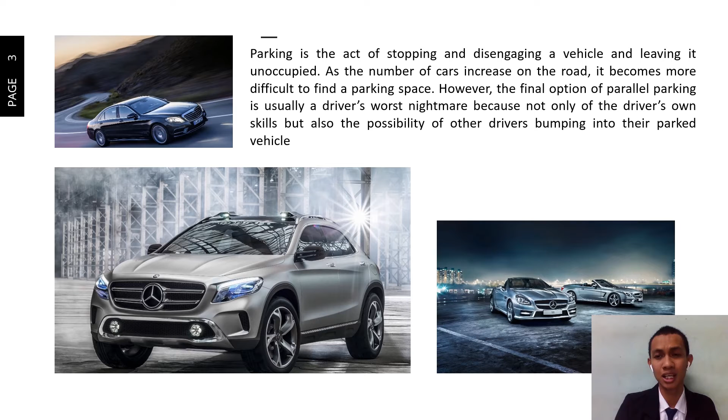So the solution is to make human work easier. Engineers are working on a new technology, automatic parking, which is an autonomous car maneuvering system that moves a vehicle from a traffic lane into a parking spot. To perform parallel, perpendicular or angle parking, the automatic parking system aims to enhance the comfort and safety of driving in constrained environments, where much attention and experience is required to steer the car.

The parking maneuver is achieved by means of coordinated control of steering angle and speed, which takes into account the actual situation in the environment to ensure collision-free motion within the available space. The car is an example of a non-holonomic system, where the number of control commands available is less than the number of coordinates that represent its position and orientation.

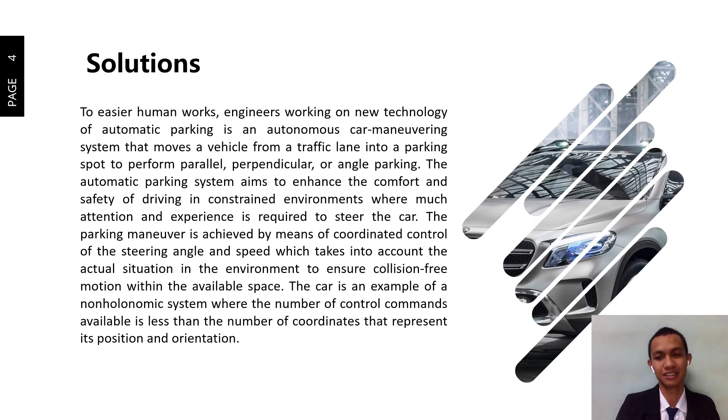Today I want to talk about the methodology. The method for the automatic parking system is proposed based on the approach of piecewise smooth switching control algorithms for chained systems, and the corresponding system package is developed.

There are three components to develop this parking system. First, we have the control law for the steering angle and the driving velocity. Second, we need to do the simulation. And third, the algorithm for various kinds of parking tasks under steering angle and parking space limitations.

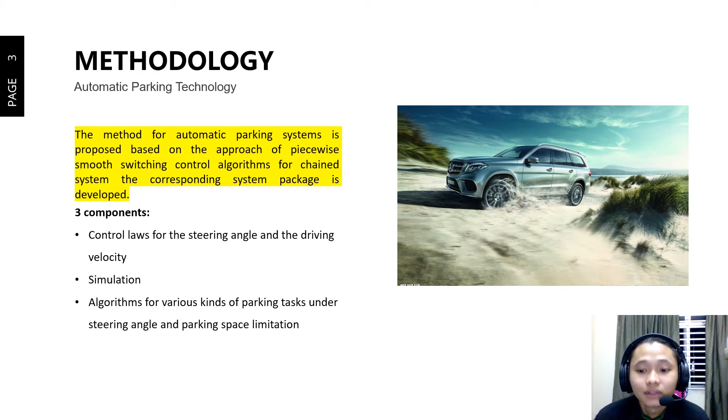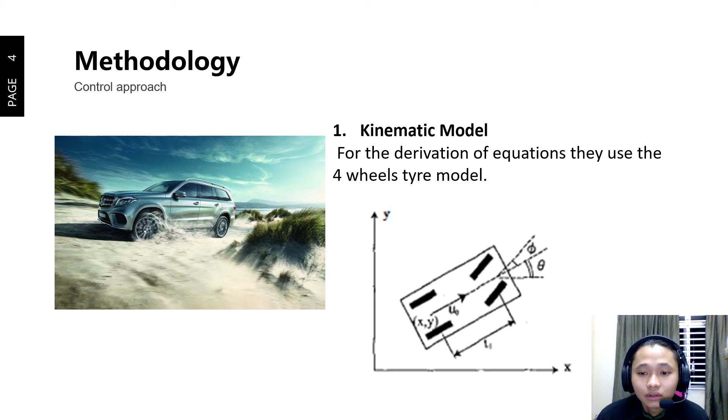For the control approach, first we must have a kinematic model. For the derivation of equations, they use the four-wheel tire model. Next is the state transformation. In order to apply the approach of piecewise smooth switching control algorithms for chained systems to the control design of this parking system, the kinematic model is transformed into a chained system first, which is the canonical form for non-holonomic systems.

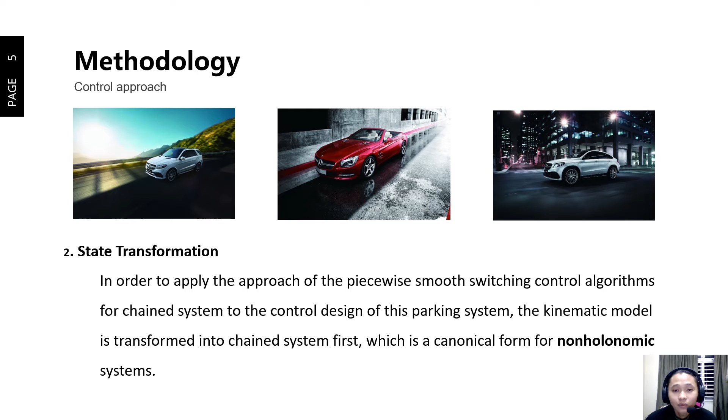The third part of the control approach is the design of the control input. Design inputs are the physical and performance characteristics of a device that are used as a basis for device design. In other words, establish and maintain procedures to ensure the requirements are appropriate by addressing user needs and intended use in terms that are measurable or can be calculated.

The fourth part of the control approach is the synthesis of input. Synthesis is a process of converting RTL to a technology-specific gate level netlist. The goal of synthesis is to get a gate level netlist by inserting clock gates and logic optimization. Usually we can see it in logic gate form.

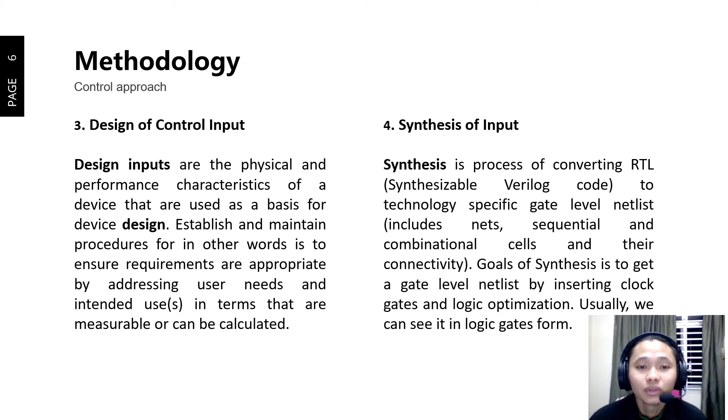After we decide the control approach, we can do the simulation. This is to validate the proposed switching algorithm. Simulations are done by considering all control conditions and equations. All related graphs will be observed and used to generate the parking algorithm. There are many simulation software that can be used, such as MATLAB and CarSim.

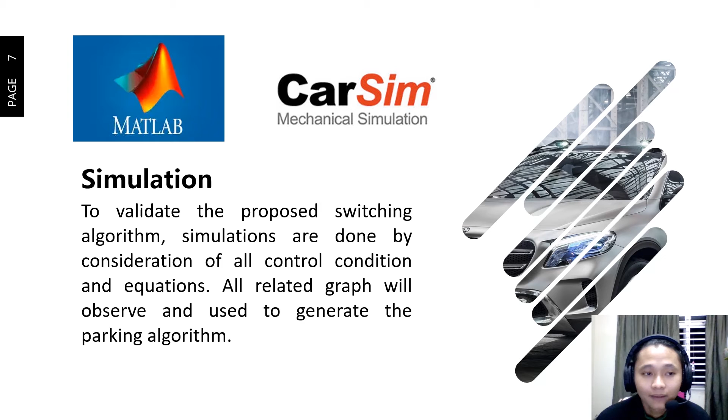Lastly, we can move to the parking algorithm. From the simulation result, a parking algorithm will be generated. The parameters are based on the car specs, such as the length of the car, width of the car, wheelbase, tread width, and the largest steering angle the car can make.

This algorithm is done to determine the desired trajectory for a car to park. All information will be stored in the ECU of the car, enabling it to give an output from the input sent from the sensor when the driver wants to use this feature.

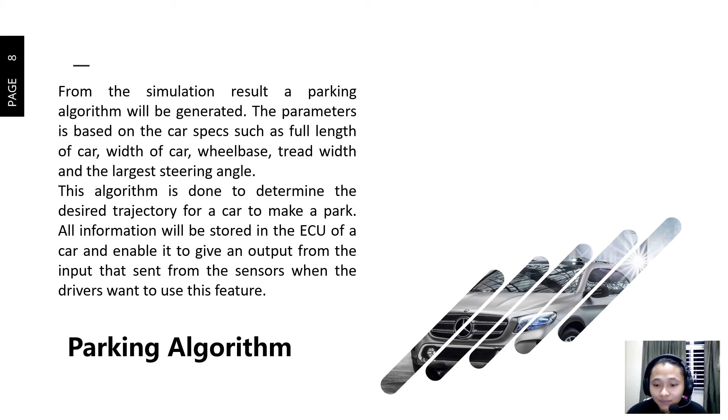This is the example of path and trajectory of parking type diagram. There are many types of parking, such as the parallel parking, column parking, and row parking.

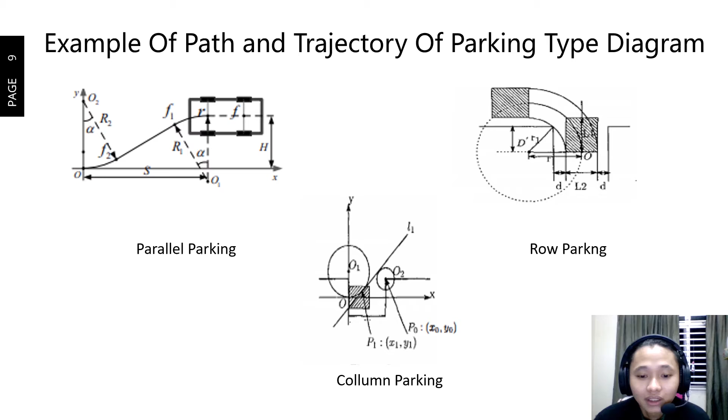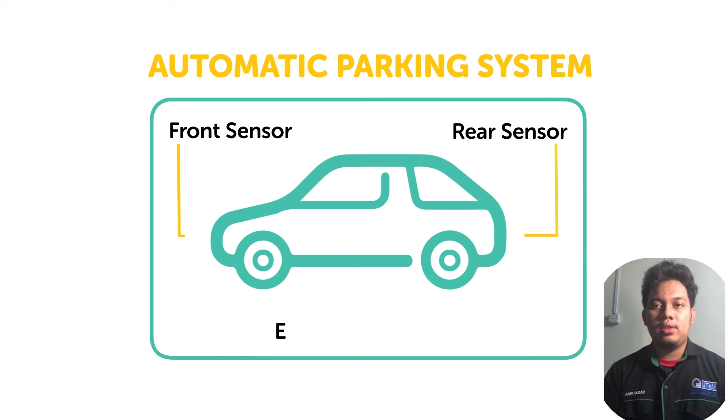Today I will present about the working principle of automatic parking system. Nowadays, people are having a hard time parking their car into a parking space. To solve this issue, automatic parking system was created. I will present how the system works on this video. There are 3 sensors in the car system: rear sensor, front sensor, and extra side sensor, which function to measure the car parking space for the driver.

When looking for the suitable space, just push the automatic button system. Make sure to keep the speed below 40 km/h. When the system notices an empty slot, it will give a warning to the driver to stop. Then put the car into reverse. After that, release the car steering and let the system do its work. The car sensor will tell when to turn.

The system will also adjust the gap between the sidewalks and the car behind and front car to avoid any damage. Although the driver puts the car in drive mode, the car will still straighten to help the driver fix the car into the parking slot.

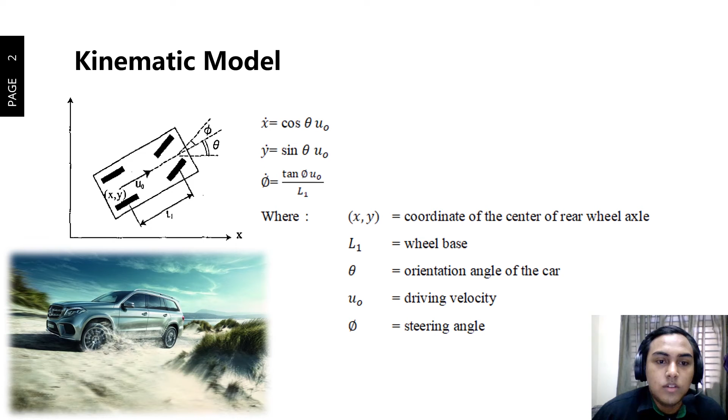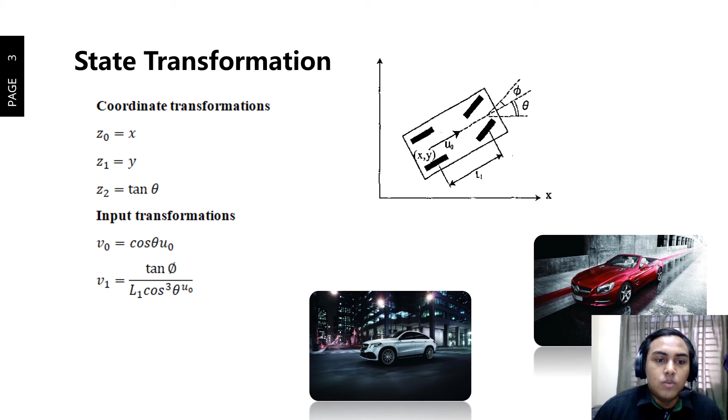I will present about working calculation. This is the kinematic model of a car in X and Y direction, and this is the formula for calculating the X, Y, and Phi rates. Next is state transformation. From the same diagram of the model of a car in X and Y, we can calculate the coordinate and input transformation.

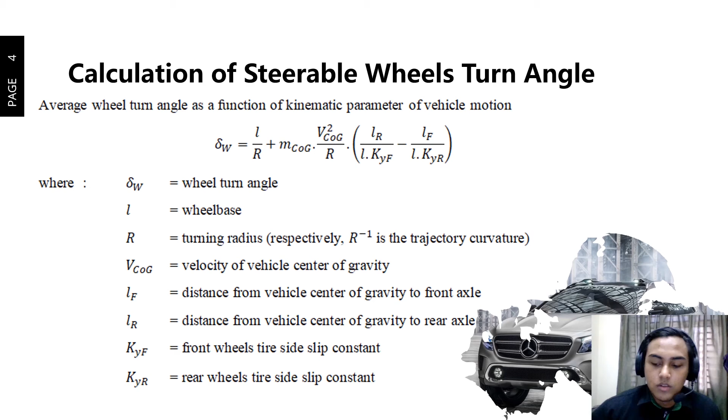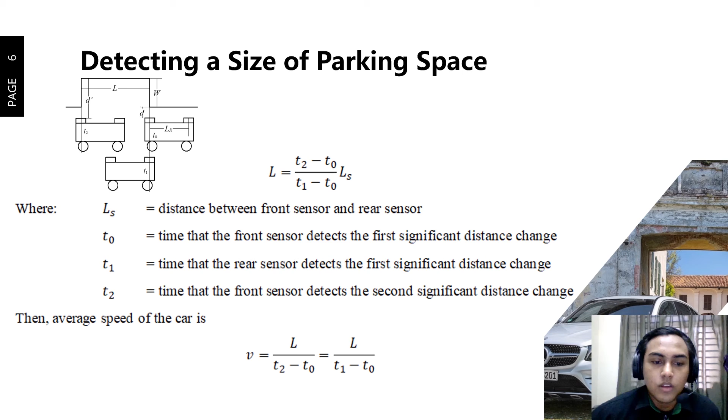This is how we detect the size of parking space. The car is installed with 2 sensors at the front and at the rear. From the time taken by both sensors, we can calculate the length of the parking space. Then from the value of the size of the parking, the car can decide whether it can park in or not.

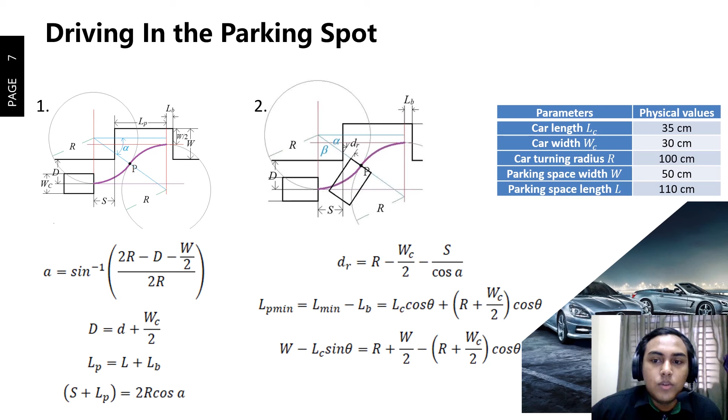I'm going to present our project, which is an automatic parking technology. This project aims to have a systematic automatic parking technology implemented in all vehicles. Reducing time lost searching for parking means reducing risk of an accident. This is indeed an ongoing project.

The study conducted on all the sensor technology utilized in the automatic parking technology assists in making an in-depth analysis of each sensor's strengths and weaknesses. With sensor assist, it will be easier for the driver to measure the parking space. The advantages of a visual-based system are tremendous, yet there are certain issues with its implementation in vehicle detection.